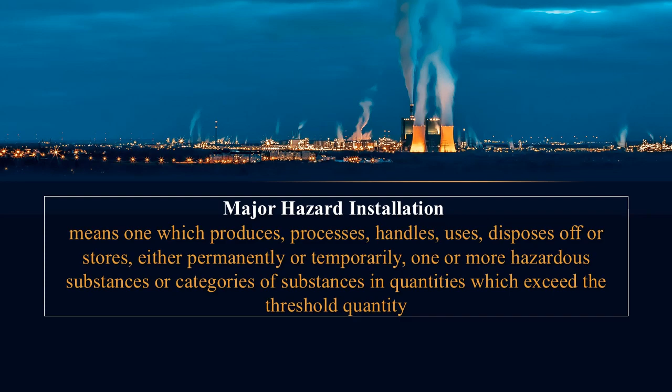Second terminology is major accident, means a sudden occurrence such as major emission, fire or explosion in the course of an activity within a major hazard installation involving one or more hazardous substances and leading to a serious danger to workers, the public or the environment, whether immediate or delayed.

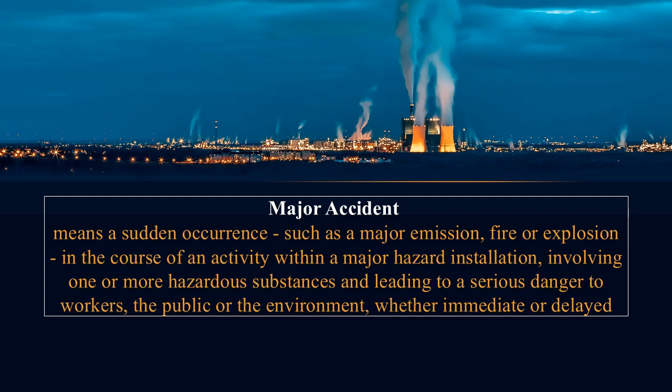Our next terminology is safety report, means a written presentation of the technical, management and operational information covering the hazards and risks of a major hazard installation and their control and providing justification for the measures taken for the safety of the installation. Coming to the main topic, which is major accident hazard control in India.

After the Bhopal gas tragedy, in which thousands of people and animals died and many are still suffering, as an aftermath of it, a series of legislations were made, including various amendments in the Factories Act 1948. The objectives of the amendments were to regulate the location of hazardous process industry in such a manner that it does not cause adverse effects to its neighborhood, to involve workers in safety management, and to provide measures for safe

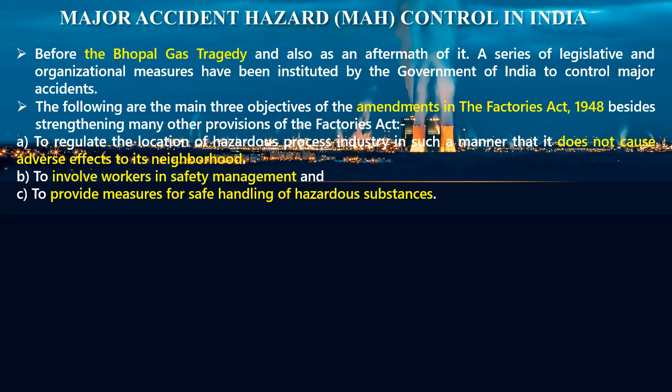handling of hazardous substances. Subsequently, the following regulations came into effect: the Manufacture, Storage and Import of Hazardous Chemicals (MSIHC) Rules 1989 and its amendments in 1990 and 1994, the Chemical Accidents (Emergency Planning, Preparedness and Response) Rules 1996, the Hazardous Waste Management and Handling Rules 1989, and the Environment Impact Assessment (EIA) Notification 1994.

Government of India, with the technical assistance of ILO, implemented a project on establishment and initial operation of a major accident hazards control system in India.

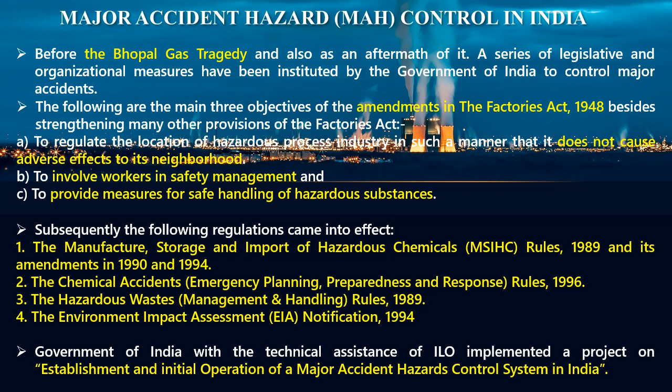In 1993, the International Labour Organization (ILO) introduced convention C-174, Prevention of Major Industrial Accidents Convention, which has 7 parts and 30 articles. This convention is also known as ILO Code of Practice for Major Accident Hazard Control. The purpose of this convention is the prevention of major accidents involving hazardous substances and the limitation of the consequences of such accidents. This convention applies to major hazard installations.

Convention 174 has given details about each and everyone's role and responsibilities. The role and responsibilities of employers are identification of major hazard installation, notification of installation to competent authority, arrangement of installation, establish and maintain a documented system of major hazard control, safety report preparation, accident reporting to competent authority and other bodies.

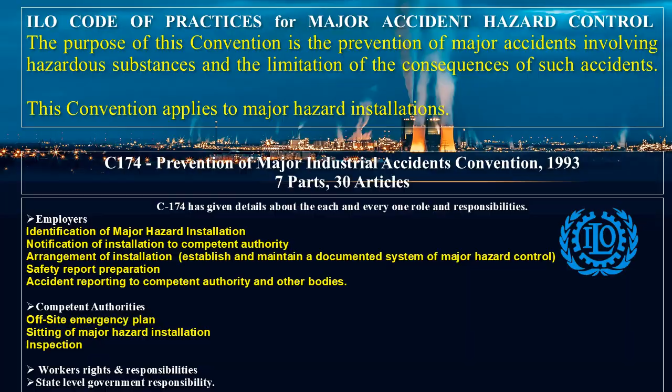There are a few components of a major hazard control system: definition and identification of major hazard installations, information about installation, assessment of MAH installations, control of the causes of major industrial accidents, safe operation of major hazard installation, emergency planning, siting and land use planning, and inspection of major hazard installations.

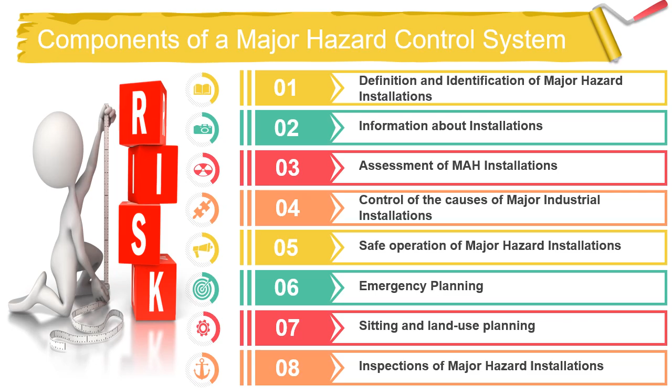MAH units are mostly associated with storage or process of NH3 or LPG plant, petrochemical plant, pesticide factory, explosive factory and fertilizer factory.

Now, let's discuss one of the most important topics, which is identification and assessment of MAH units. Schedules 1 to 3 of the MSIHC Rules 1989, prescribed for toxic, flammable and explosive chemicals, list out the hazardous chemicals and give their threshold quantities for application of certain rules. These storage quantities and processes listed in Schedule 4 are now legal criteria to identify the plant to be under

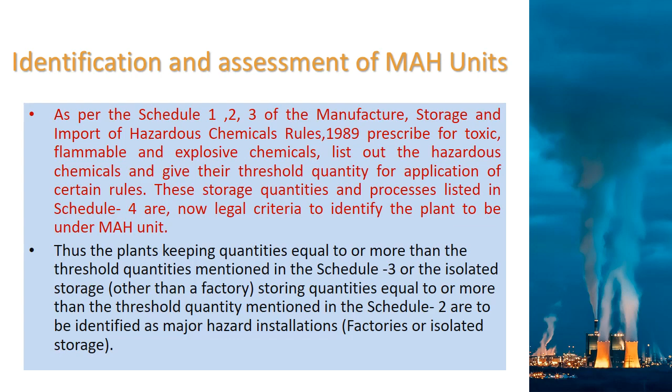MAH unit. Thus, plants keeping quantities equal to or more than the threshold quantities mentioned in Schedule 3, or isolated storage other than a factory storing quantities equal to or more than the threshold quantity mentioned in Schedule 2, are to be identified as major hazard installations.

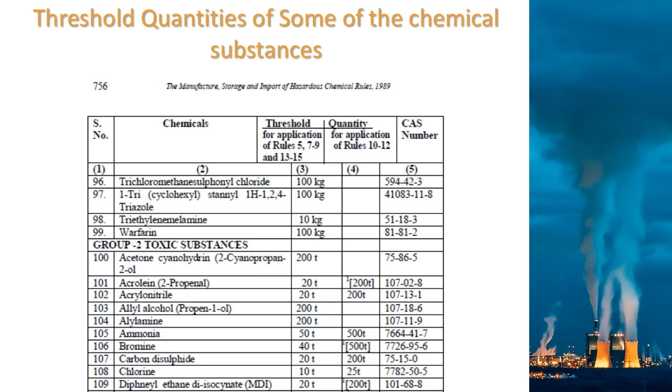Now, we will see what is the role of management in major hazard control. Provide the information to the concerned authority about the criteria of quantities and hazardous process substance to identify the unit as an MAH unit. Carry out the safety audit and risk assessment report and submit to the concerned authority in prescribed format. For example, safety report as per Schedule 8, MSDS as per 9, information of imported chemical 10, on-site and off-site emergency plan as per 11 and 12.

Collection, development and dissemination of information. Provide on-site and off-site emergency plan based on guideline of factory inspector. Provide safety measures to prevent the major accident and their consequences. Provide safety training to workers. Keep updated the information of changes in threshold quantity of hazardous chemical.

Provide information to the public liable to be affected by major accident. Inform within 48 hours to the concerned authority if any major accident happens. Inform within 30 days to the concerned authority for the import of any hazardous chemical. Maintain and keep the record of imported hazardous chemical.

Now, we will see the role of central government. To enact, implement and amend the law on major hazard control. To require statutory information from industries to identify the unit as MAH unit in the form of safety report and on-site and off-site emergency plan.

To compile data of MAH units state-wise, district-wise, nationwide with the list of MAH factories, hazardous chemicals, process, type, quantities and consequences. Provide the valuable information to MAH management and to the workers and general public also. To set up the central crisis alert system as per Rule 4 of Chemical Accident Rules 1996.

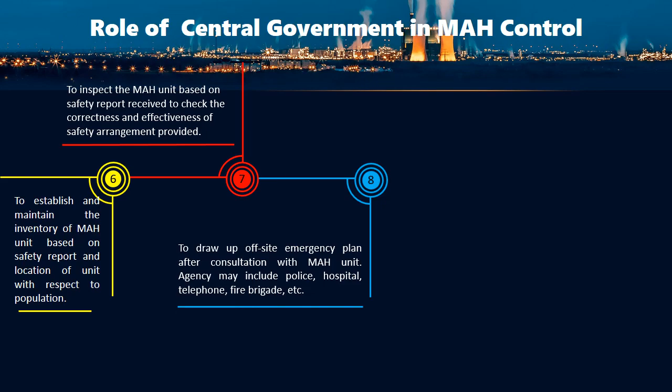To establish and maintain the inventory of MAH units based on safety report and location of unit with respect to population. To inspect the MAH unit based on safety report received, to check the correctness and effectiveness of safety arrangements provided. To draw up off-site emergency plan after consultation with MAH unit. Agencies may include police, hospital, telephone, fire brigade, etc.

To provide safety checklist to evaluate safety measures and develop inspection system and program. To make and implement siting policy to separate MAH units from other units and population.

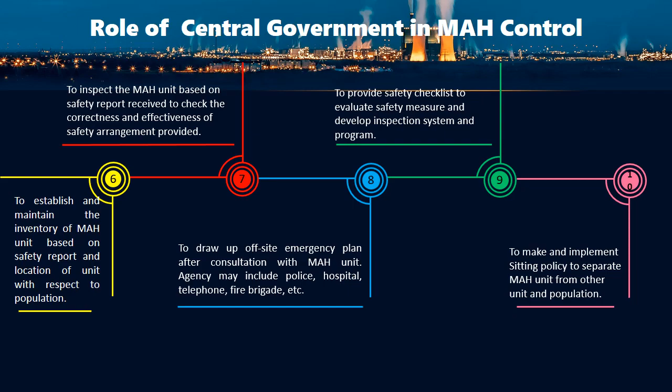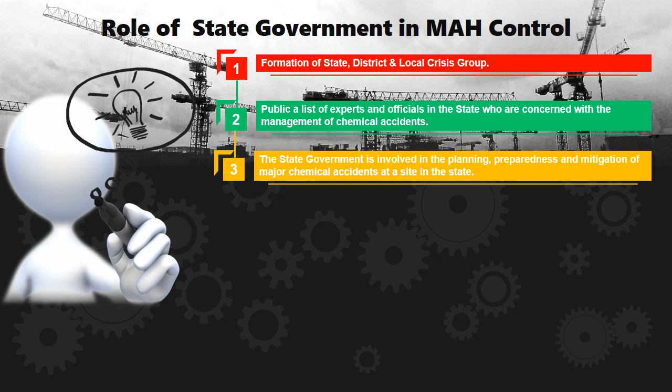Now, we will see the role of a state government in MAH control. Formation of state, district and local crisis groups. Publish a list of experts and officials in the state who are concerned with the management of chemical accidents. The state government is involved in the planning, preparedness and mitigation of major chemical accidents at a site in the state. Educate the population likely to be affected in chemical accident about the remedies and existing preparedness in the area.

Ensure dovetailing of local emergency plan with the district off-site emergency plan. Review all the on-site emergency plans prepared by the occupier of the major accident hazard installation for the preparation of district off-site emergency plan.

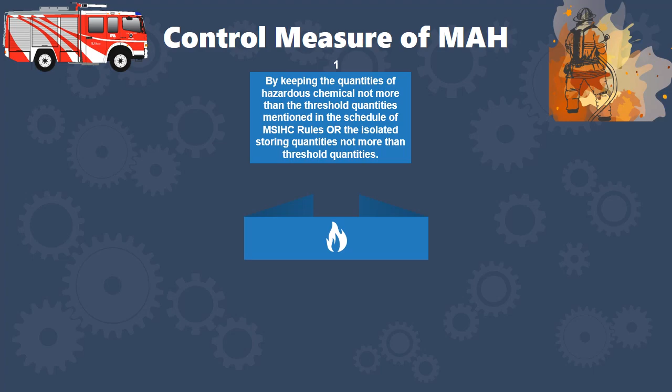Now we have the last and most important topic, which is control measures of MAH. Here we will learn what are the measures to be taken to control major accident hazard. By keeping the quantities of hazardous chemical not more than the threshold quantities mentioned in Schedule 3, or the isolated storage quantity not more than the threshold quantities mentioned in Schedule 3. Carry out the safety audit and risk assessment to identify the major hazard. Prepare the on-site and off-site emergency plan based on the guideline of factory inspector.

To identify the major hazard by developing and utilizing various techniques such as ETA, event tree analysis, FTA, fault tree analysis, hazard and operability, etc. Provide safety measures to prevent major accident and their consequences. Provide safety training to workers. Keep updated the information of changes in the threshold quantity of hazardous chemical.

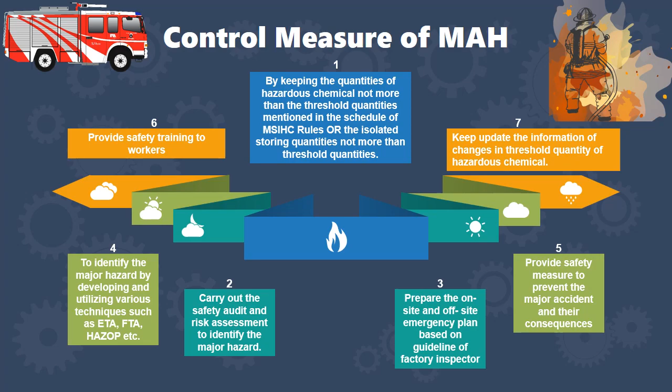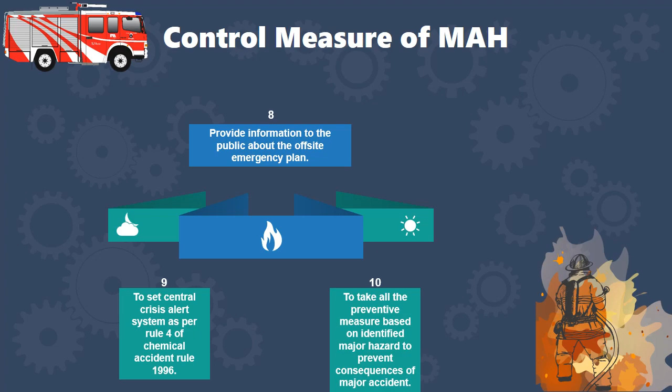Provide information to the public about the off-site emergency plan. To set up the central crisis alert system as per Rule 4 of Chemical Accident Rules 1996. To take all the preventive measures based on identified major hazard to prevent consequences of major accident. Prepare safety checklist to evaluate safety measures.

For safe operation of MAH installation, we should pay attention to design, manufacturing and assembly of the components, process control, safety systems, sensor controllers, pressure relief, emergency shutdown, water spray, fire detectors, etc. Monitoring the safety related components and systems, inspection, maintenance and repair, training of workers, supervision and control of contract work.

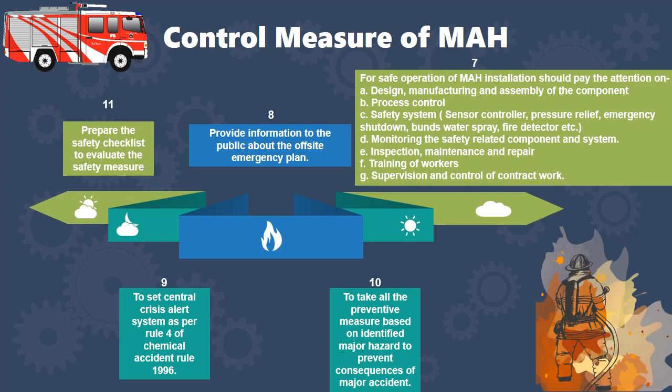In our next video, we will discuss emergency planning and response and crisis system in India.